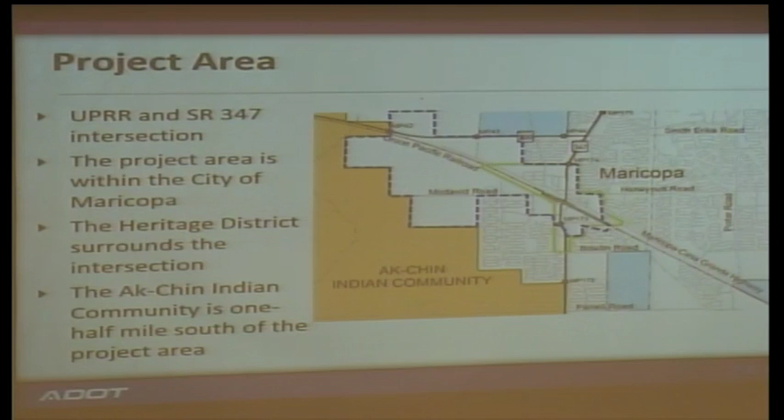So the purpose of this project was to evaluate potential grade-separated crossings of the Union Pacific Railroad tracks. Grade-separated simply means it's bridged. And then look at solutions that would improve access, mobility, and address congestion on State Route 347.

And the reason we're doing this, we identified a bunch of different needs. For most of you, this is probably not new, you all know why this is needed. But there's been a huge spike in population here in Maricopa. It's grown dramatically. There's a lot of traffic on State Route 347 today, around 31,000 vehicles, and projections take it up into the mid-60,000 vehicles a day.

And of course, we have the Union Pacific Railroad tracks that come through here. There's 40 to 60 trains a day. They come through at a high speed. It's projected for as many as 100 a day, as well as additional sets of tracks. We also have the Amtrak station that's there, and when passengers embark or disembark, it blocks the road.

So what we did a couple of years ago, when we were doing the studies, we came back and said, okay, we're going to look at all these different potential alternatives. There were 10 that came through, and we talked to you as the public about them a couple of years ago. Three of them came from an original study that the city initiated back in 2007 that looked at what might be done to establish a bridge here. And the remainder were things that were developed before.

And whenever we do one of these, we always look at what's called a no-build alternative. That just answers the question, are we doing the right thing by building something at all, or should we just leave it alone? So we always ask that question as kind of a back check when we look at these things.

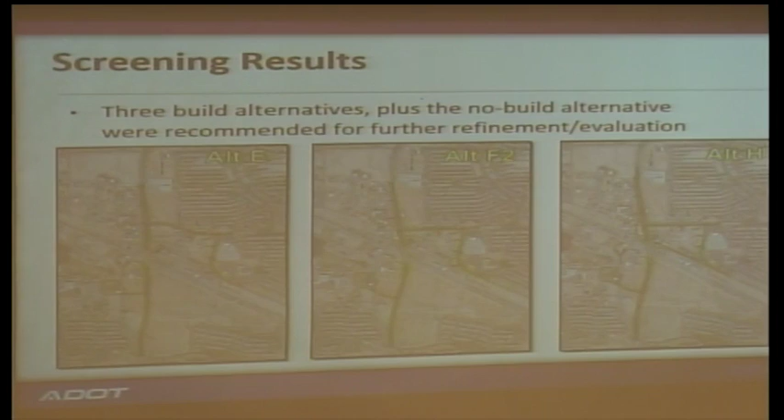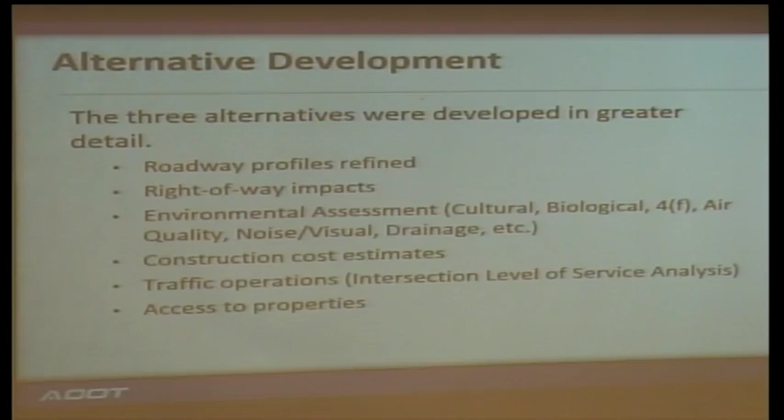We refined those alternatives, and again, they're a little difficult to see, but they're here. When we looked at these in a lot more detail, these drawings were more developed, similar to the ones you might have seen at the tables or boards prior to the meeting. We evaluated them based on a bunch of different criteria, some environmental, some engineering. We looked at the cost to build these different facilities, and how they might affect access to businesses or residences. We tried to incorporate all this for these 3 alternatives and then assess which would be the best and the one we would recommend.

Alternative E, when we looked at it, we didn't recommend this one. There were several reasons. One, it had the biggest right-of-way impacts. It had a lot of residential, a lot of business and commercial impacts. It cost the most. And one of the key things that's important here, because it affects other alternatives, was the city of Maricopa—as you know, there's a lot of commuter traffic that goes from here up towards the Phoenix metro area and back again.

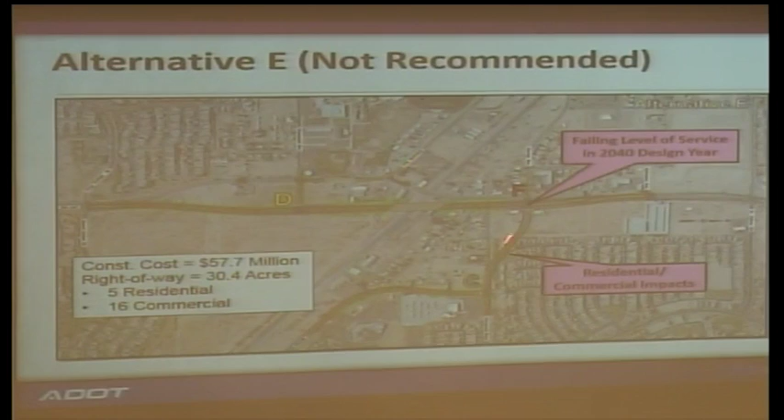The intersections of Maricopa Casa Grande Highway and Honeycutt Road are only 300 feet apart. You can't put two signals together that close—it'll wreck the traffic operations, it'll just fall apart. So we had to either spread them apart wider or combine them together, and the option was to combine them. When we did that, there were so many cars coming this way that wanted to turn and come this way—turn left. Left turns damage an intersection, because when you're waiting there and there's a signal and everybody's turning left, everybody else has to stop and wait.

It really increases the delay at the intersection, so you try to avoid left turns as much as you can. This one had so many that it resulted in what's called a level of service F. When we score roads, we score them just like you get grades in school—you want to get A's, that's the best, and if you get F's, that's not good. This one actually scored an F from a traffic operations perspective, from a level of service perspective. We said, well, that's not very good, and the right-of-way impacts were too high, so we didn't want to recommend this one.

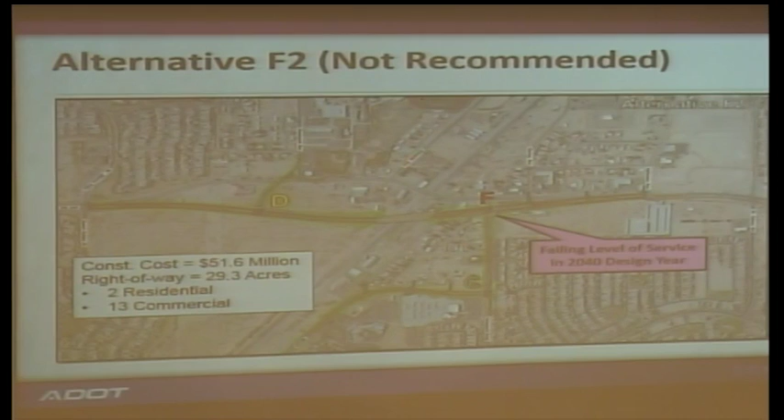So then we looked at alternative F2, and it was a lot better—a lot lower cost, a lot fewer right-of-way impacts. But again, we ended up with this same type of intersection problem where the two intersections, when combined, got a level of service F. I should say this is during rush hour traffic—peak rush hour traffic that we look at. We don't look at how it does at 2 o'clock in the morning; that's not very valuable. So we look at what it does at 7:30 in the morning, what it does at 5:30 in the afternoon, and try to anticipate how that's going to operate. This one didn't work so well either, and we didn't recommend it.

One of the things we did then with alternative H is we said, we've got to solve this intersection problem. We said, okay, what we can do is get rid of some of these left turners out of this intersection.

And we made a one-way road that came around along the Maricopa Casa Grande Highway alignment and went under an extended version of the bridge over the railroad tracks. What that did is it allowed people who wanted to go down to Maricopa Casa Grande Highway, who would normally turn left here and then go there, to have a free flow movement. It was almost like a ramp, but it was really just a one-way road. And it came around, and it took a bunch of left turners out of this intersection, and then it went to a level of service C.

And we said, great, that passes, that works. The other side benefit is that there was always concern about how you provide access to some of these businesses down in this area when you're building a bridge way up in the air, and how do you get to them. When you kept this little one-way road at existing ground level, all of a sudden then you could have access to those businesses.

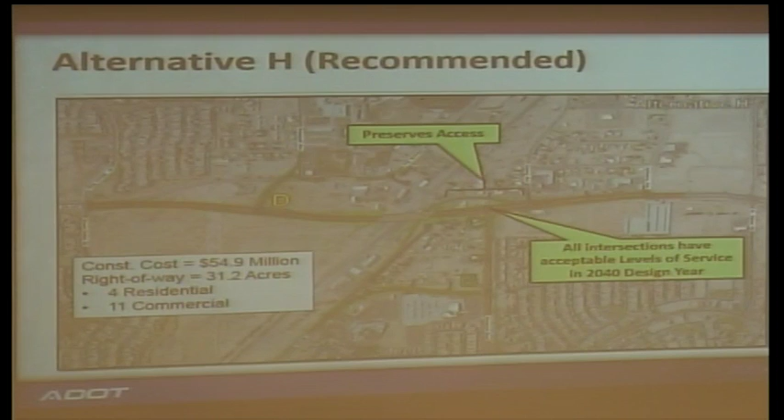Albeit off of a one-way road, but it kept some access there. And you notice that the right-of-way impacts and the cost were somewhere in between the other two, and we said, okay, this one works from a traffic operations perspective. We're going to recommend alternative H. And that's what we presented to you the last time we were here in December of 2015.

And to explain a bit by why we're here again, I think it's important to understand the National Environmental Policy Act. This project is going to utilize federal funds, and any project that uses federal funds, the public agency has to go through this National Environmental Policy Act process, NEPA we call it, and it evaluates different potential effects to social, economic, natural resources, all those kinds of things.

It provides an opportunity for you, the public, and other affected agencies to come and provide comments and inputs and direction on what we do. And it assists then in the final decision-making process. The input that we get from this helps decide what we're going to do. Like I said, that whole alternative H was developed primarily based on what we heard from the public.

And so within a National Environmental Policy Act, you have to produce an environmental document of one kind or another. In this case, we developed what's called an environmental assessment, an EA. And what an EA does is it goes and looks to see how well this project complies with the National Environmental Policy Act. And it evaluates a bunch of different things.

It looks at the purpose and need. It looks at different alternatives. It looks at the environmental impacts of the alternatives, and evaluates a whole host of different types of criteria within that environmental realm that we have to think about. Things like land use, environmental justice, cultural resources, hazardous materials, all those kinds of things have to be examined and looked at with that document.

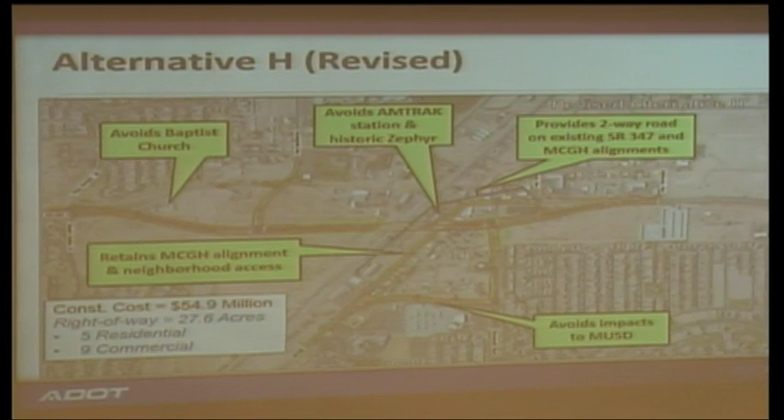In order to save some of the homes and businesses down in here, we ended up putting walls through this area between the bridges and just after the bridges. So there was extra construction cost that was incurred. But the net effect, we believe, was a better alternative without increasing the cost. And that's the hope with value engineering, is that you end up with something that helps you better address the project needs.

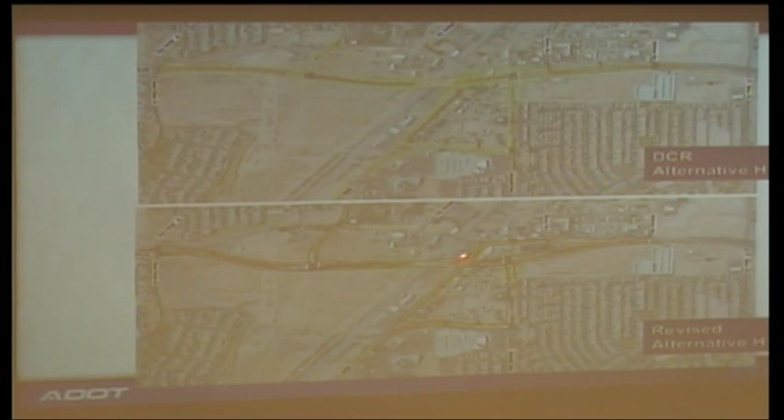Sorry. The original alternative went through the Baptist church. This one avoids it. The original alternative had that road that came around, and the other one went through the Amtrak station. Now we're avoiding that. And you can kind of see this was a 2-way road, this was a 1-way road, and you can see the differences. There was a little frontage road right here. Now it's just the same as it is today, just with sidewalks and bike lanes.

To highlight these differences in right-of-way, right-of-way is the land that needs to be purchased for the road. That's what it's called, right-of-way. To highlight those differences, we put them here in color, and again, there's this exhibit right here behind the guy with the camera that you can look at in more detail if you want to see it.

Some of the parcel lines are shown on here. They're approximate, they're not precise, but it gives you an idea of where things are. Everything that is in yellow is the revised alternative H. You can see the Baptist church, it comes around and goes around it. Everything that's in blue was the original alternative H from the design concept report, the DCR. And then what do blue and yellow make? Green. So everything that's in green is where they overlap. And you can kind of tell the differences between the 2 there.

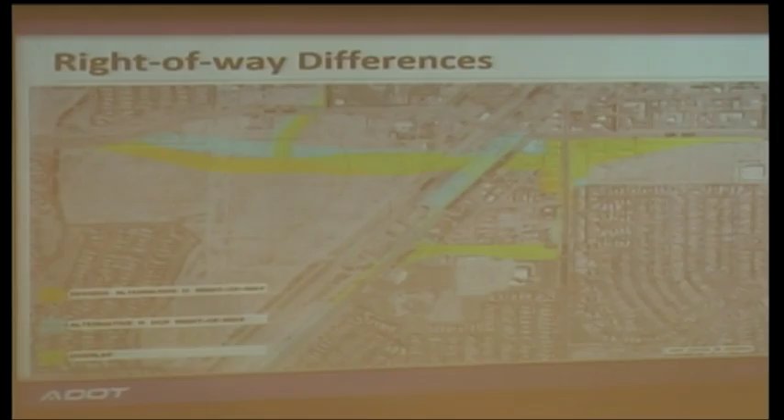And so, where do we go from here? Well, again, as I talked about before, the feasibility study was done in 2007. We went through this environmental assessment and design concept report over a period of a couple of years there. We're now entering into final design. That's where we actually make the construction plans to go out and build something. And we're doing at the same time this reevaluation of the environmental assessment, and that's where we're at.

Right-of-way acquisition is in its beginning stages, and some of you may have already been contacted by ADOT's right-of-way acquisition agents. If your property is affected, expect more interactions with them over the next 10 months. Construction is expected to begin in fall 2017, and once the road is built, it has to be maintained. Your input is important, and there are many ways to provide it, including websites and comment cards. We'll answer some questions tonight, and you can meet with any of us afterward at the exhibits. Thank you for being here.

Thank you, Elijah, for that clear and concise overview. I received two question cards. I know it's crowded and we really want you to meet with the team members, so I'll collect these quickly. If you want to pass them up, I'll read them and have the project team address them. I'll just take a few minutes to do this, but really we want to get you to the project team members to ask individual questions.